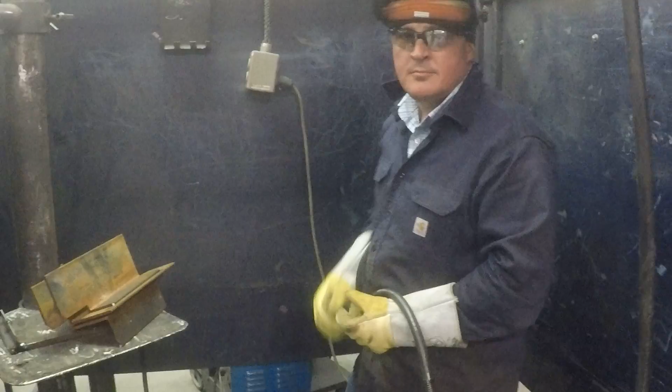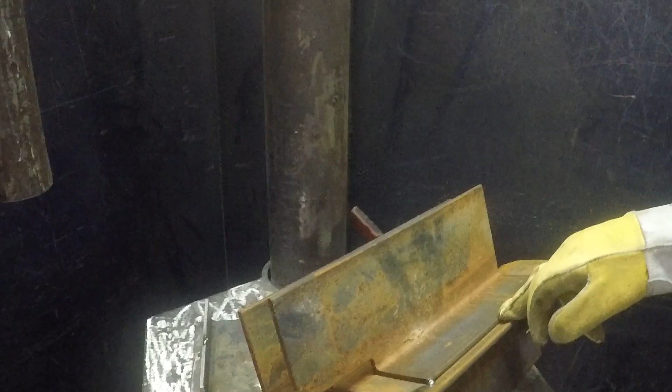Guys, so this is Pulse MIG module number 3, video number 2, and like I promised, what I did is I got something identical to what we did our trial run on, but on this one I left just a nasty mill scale ridden piece of material, tacked it up. I'm not going to lie to you and tell you it won't weld. I'm just going to tell you you're not going to like the performance, and you're not going to like the outcome, and you're not going to like the way it looks.

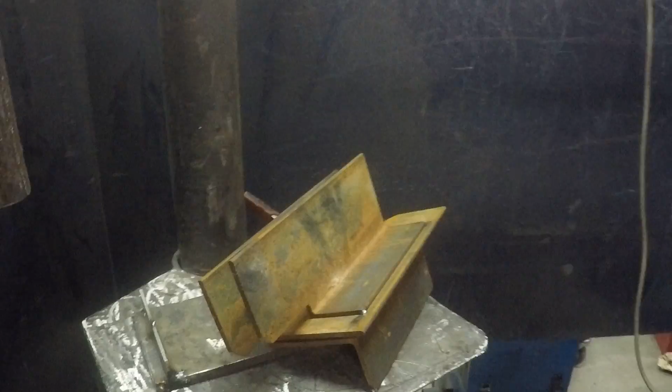I'm going to do everything that I did before, so if you come over to the machine, you'll notice I'm at 50 on my arc length. I'm at 325 on my wire feed speed, because that's what I set up, that's what I like. 35 CFH on my 9010 shielding gas.

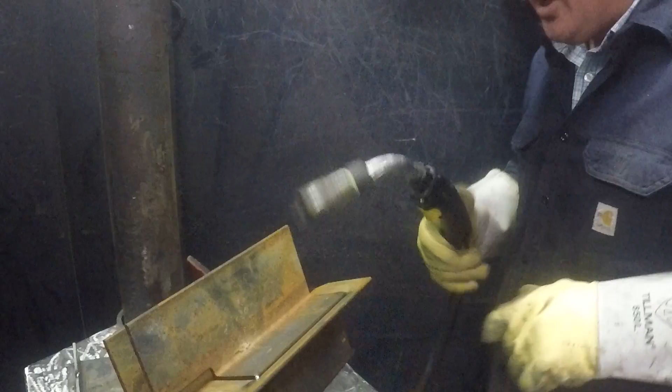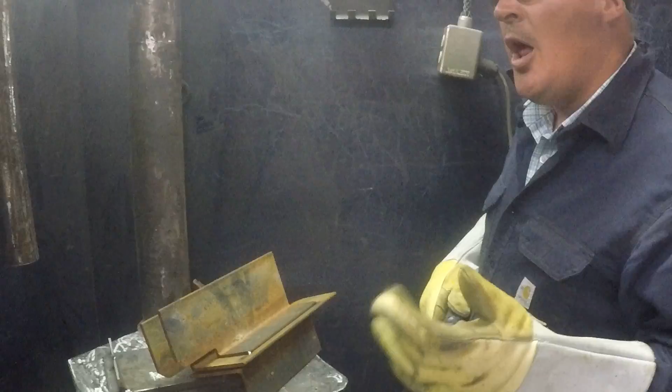But in this one, you're going to notice it pops and hisses. Now, there's some things that I can do to avoid that. Arc length, or not arc length, stick out is one of them. When you first strike your arc, if you're hearing a lot of popping and spattering and hissing, it may be that your stick out is too close. Back away and it may quiet up a little bit. On cleaner steel, you can hear this and see this better.

Dirty steel, it's going to pop, hiss, and spit no matter what. So let's run some on the dirty steel so that you can hear it and get a sound for it. And then we will run some on clean steel and see if we can tell the difference. Ready? Eyes.

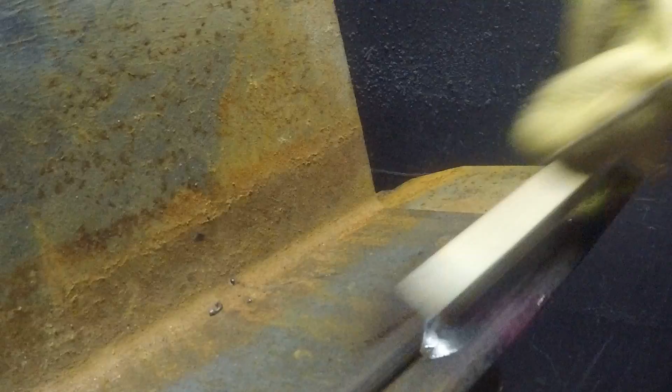Okay, so we run a little bit. If you guys come in here and look, we got a weld. It tied in. It's all right. Did it spit and pop and hiss horribly? No, but it was there a little bit. I did hear it. I didn't really like it.

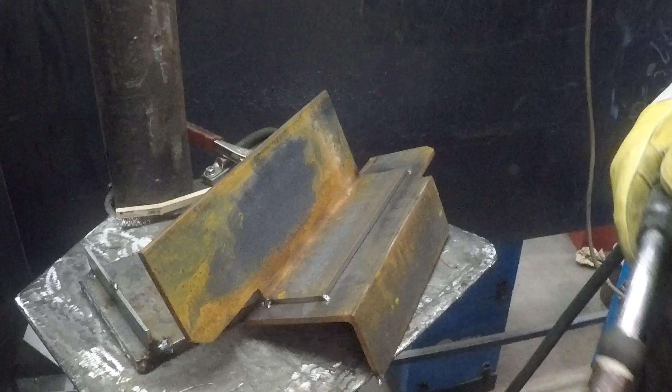So we're going to put that down to the side, and I'm going to grab my clean piece, the piece that I cleaned the scale off of. Okay, same thing, same everything, just a simple lap joint. I'm going to adjust that stick out to where everything quiets down, and I'm going to do a slow circular motion. We're going to talk about that here in a little bit on my little playbook dry erase board there. But let's run one and see how we're doing. Eyes.

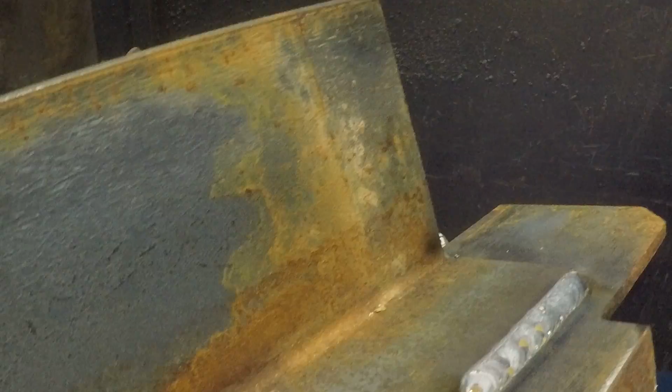Okay, if you look, what you notice, my toes are a little cleaner. I definitely liked the sound of it a lot better. And while I'm welding, that puddle is not erratic. With the dirty steel, it's kind of all over the place.

The toes are really hard to see because you pull a lot of that scale to the surface and it hides your toes and you can't really see. On clean material, man, those toes are just as clean and crisp as you can be. You can see down where your penetration's tying in. Everything's nice and consistent. Once again, did a circular motion, ran that bead, nice sound. Didn't hear a lot of popping or hissing in between there.

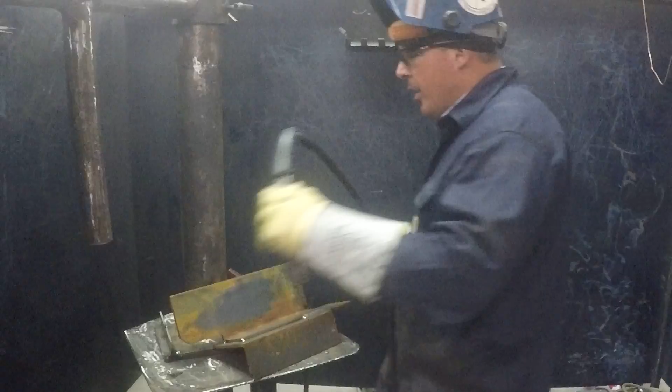So that's Pulse MIG. Now, my goal is once we get through the modes of transfer and I show you guys the way to set them up, simple basic operations of them, what they can do, what they can't do, I want to try to get into some pipe stuff. And when we get into pipe doing position work, I'll start rehashing the Pulse MIG, the spray, the RMD, all the different modes of transfer we're going to go through this class, but that will be towards the latter modules.

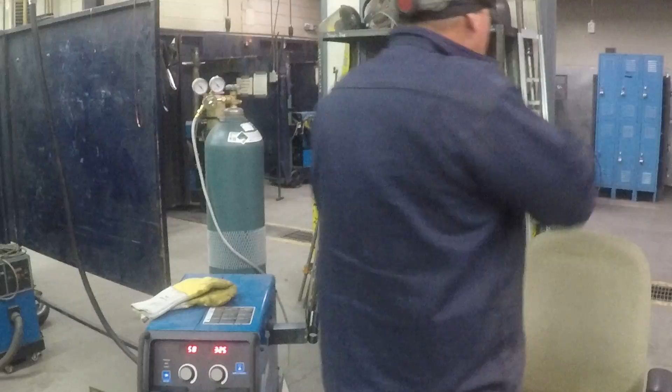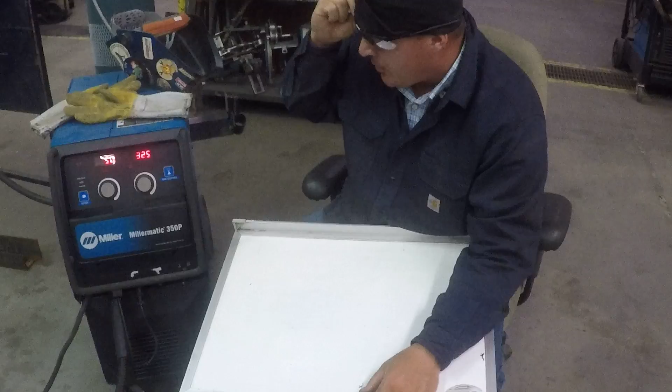So before I let you go, we're going to go back over here to my dry erase board real quick. I'm going to pull out my dry erase marker, and we're going to talk about why it is that I ran a circular motion. Because I'm going to tell you guys, I'm one welder of many, and there's a lot of guys out there that will probably run it different than I do.

There's some people out there in the industry that say, you know what, I just drag my Pulse MIG. And if that's you, great, cool, fine. As long as you make it look good, tie in, and hit your weld size, we're okay with that.

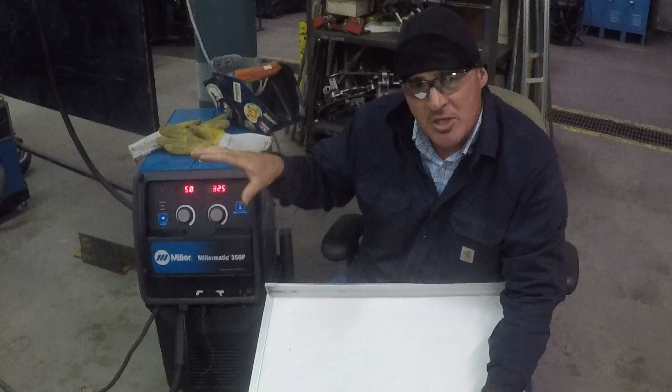Myself personally, I've got to add a little manipulation so that I can keep my travel speed consistent. That's what manipulation does a lot of the times for me, especially in wire welding. Adding a slight amount of manipulation, and if you can see while I'm welding, it's not crazy, it's nice and consistent and slow and smooth. I don't leave the puddle. That manipulation adds some consistency to my travel speed, and therefore it adds consistency to my weld size, and that's why I do it.

And there's a reason why I ran circles. So if I'm running circles as a manipulation, all I'm doing inside that puddle is circling nice and smooth, keeping my travel speed nice and consistent. Circles.

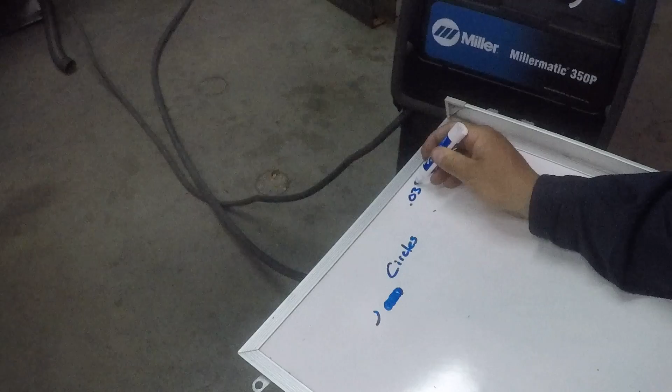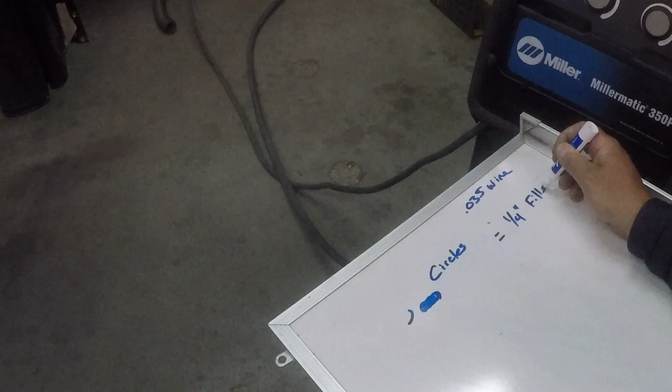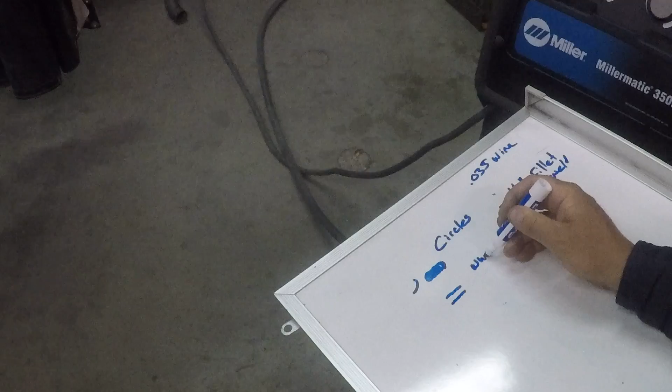We're running 035 wire, are we not? So we're running 035 wire. Using a circle manipulation with this kind of setup is going to give me a 1/4 inch fillet weld size. If I did a slight whip, or whip and pause, or whatever you want to call it—it's just a forward-backward motion, we'll call it a whip—that is going to give me a weld size of 3/16 of an inch.

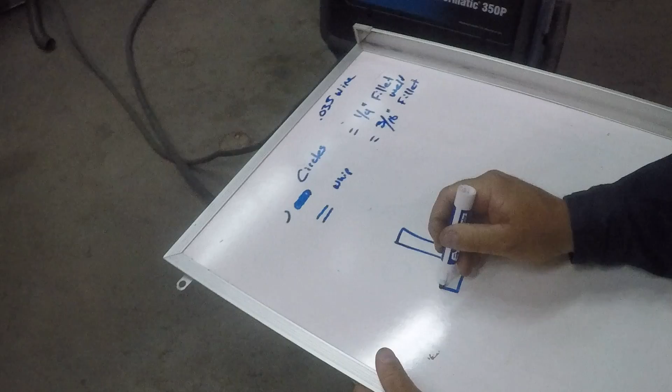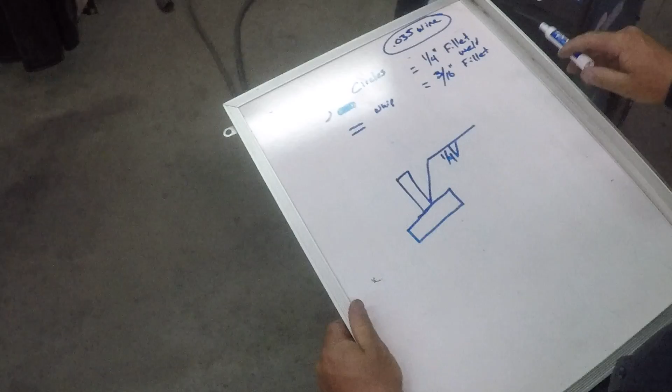Now that's kind of cool, because if I throw up a joint and I say, all right, here's a weld joint, T-joint, there's your fillet weld, I want a 1/4 of an inch. If I'm restricted to this wire size, then I can say, well heck, I can do that. I'll set my machine 50 on the arc length, 325 on the wire feed speed, and I'm going to run a 1/4 inch fillet weld, so I'm going to do circles.

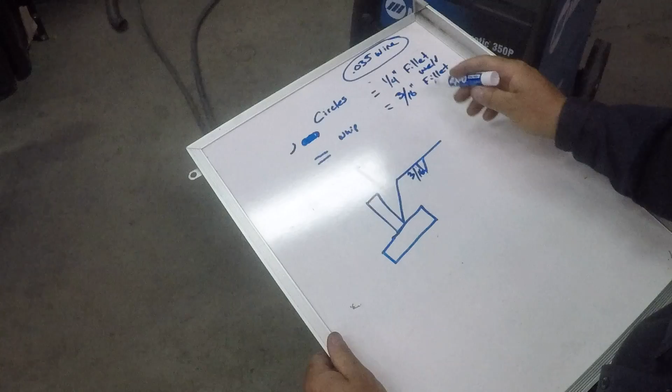Maybe that game changes, and they say we want a 3/16 weld here. Okay, well I'm going to still run 035 wire, still run 50 on the arc length, still run 325, but I'm going to do a whip and pause or a whip and hesitation motion, which is going to give me a 3/16 fillet weld.

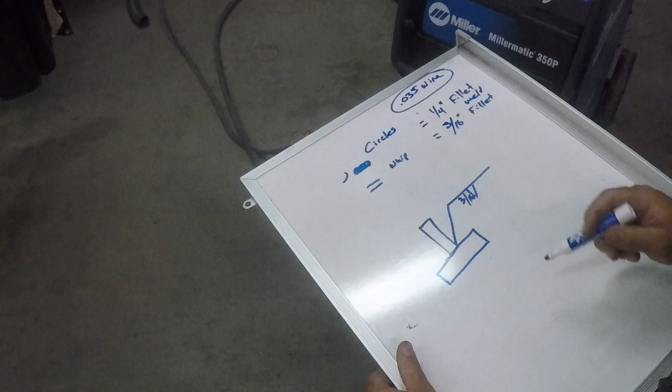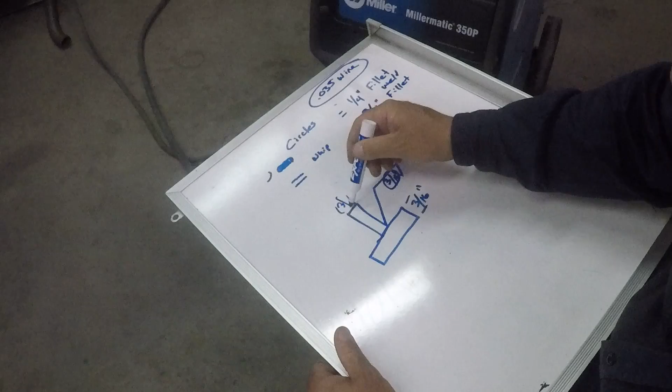Now remember, fillet weld sizes are usually equal to their material thickness. So usually when they're going to ask for a 3/16 weld, there's probably 3/16 material thickness here. Now if I don't give you that weld size and I just give you a fillet weld, then as a welder you should automatically go to the material, and that is what your weld size should be.

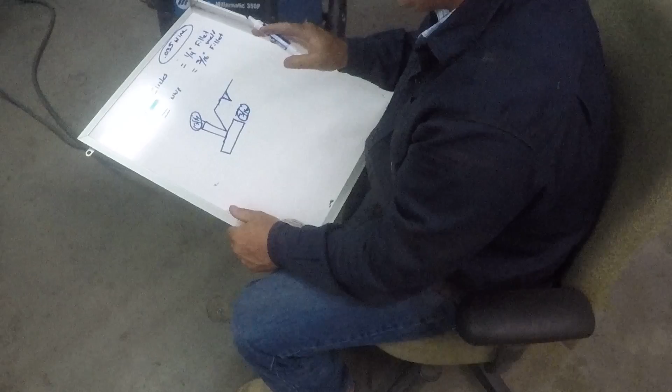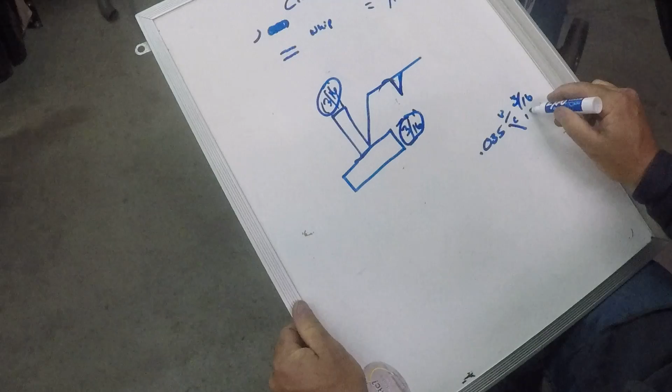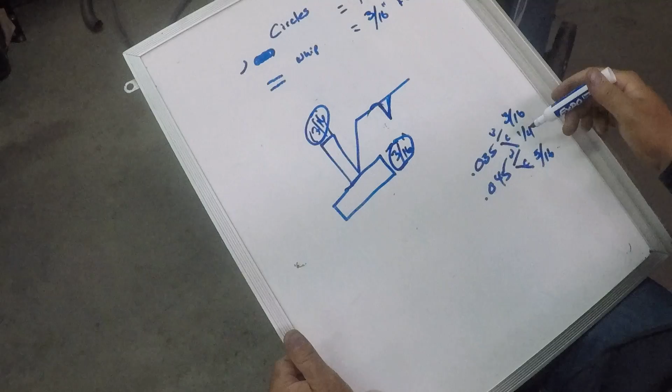Now I'm going to give you one more quick thing before I let you go. We dealt with 035, right? We said whip would give us a 3/16 weld, circles would give us a 1/4 inch weld. If I went to 045 wire, a whip would give me a 1/4 inch weld, circles would give me a 5/16 weld. See how it grows a 16th every time you add a wire size?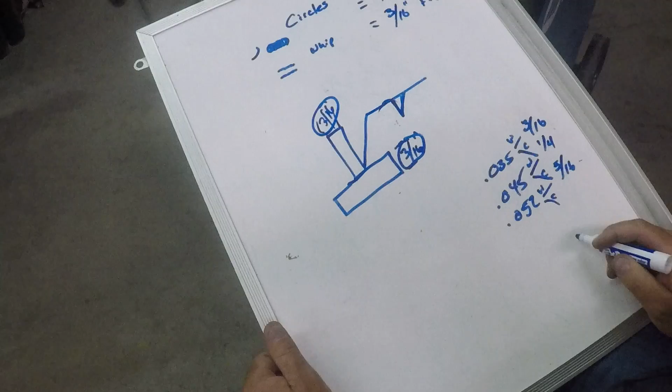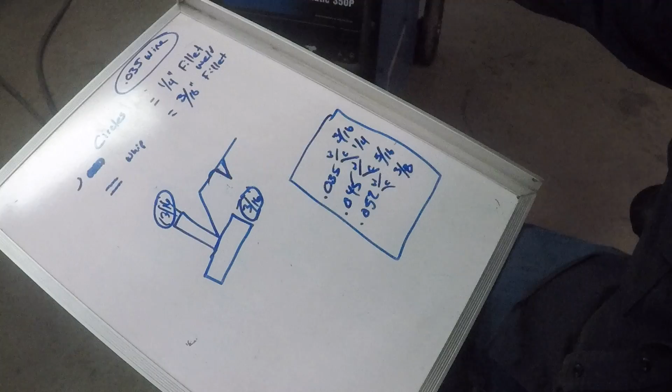We'll go with 052. A whip will give me a 5/16 weld size with 052 wire. Circles will give me a 3/8 weld size with 052 wire. So now you can build yourself a little chart, weld size versus wire size. You can kind of even give yourself a little chart: here's my arc length, here's what I was at for wire feed speed for 1/4 inch material.

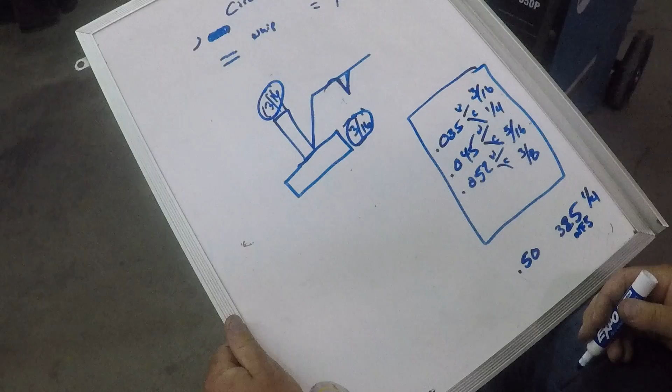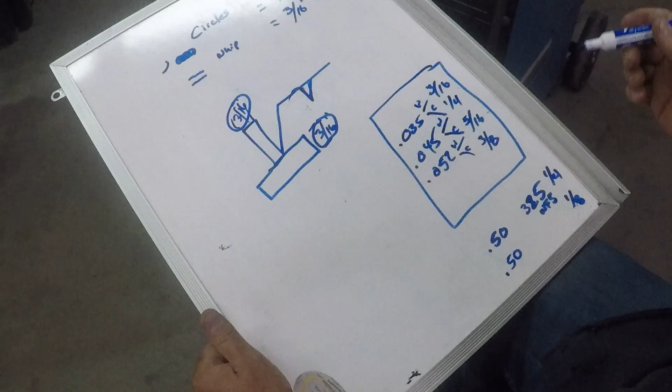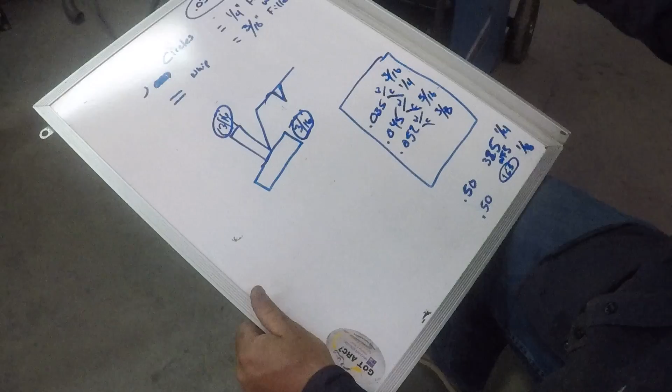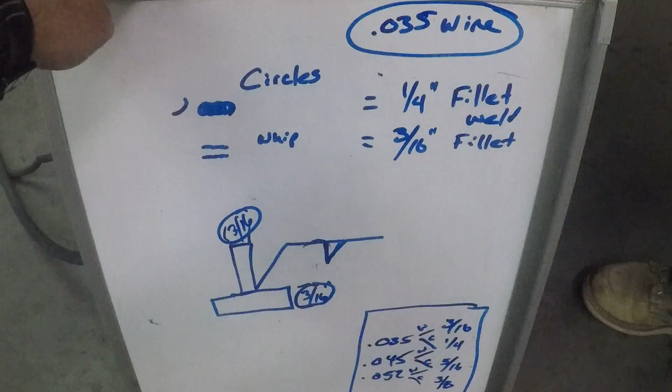Thanks for tuning in today on the Pulse MIG section. Here's your notes—hopefully you guys are taking notes, making flashcards, getting all this information put together. And remember, if you ain't burning, you ain't learning.